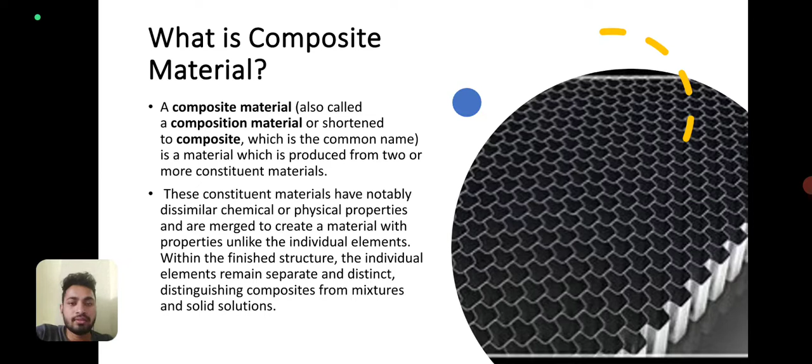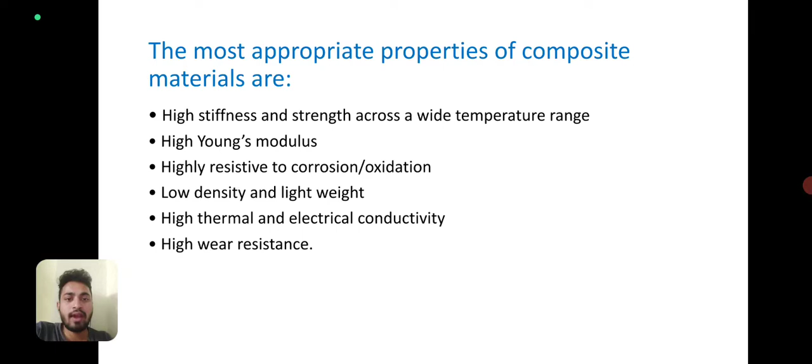The most appropriate properties of composite materials are high stiffness and strength across a wide temperature range, high Young's modulus, high resistance to corrosion and oxidation, low density and light weight, high thermal and electrical conductivity, and high wear resistance. Let us see the characteristics of composite materials. There are many types. In this video we will discuss some important characteristics.

The first one is mass. Carbon composites are generally considered 4 times lighter than most steels. Density of steel is 7.8 kg per meter cube. Density of graphite damping composite is between 1.4 and 1.8 depending on composition.

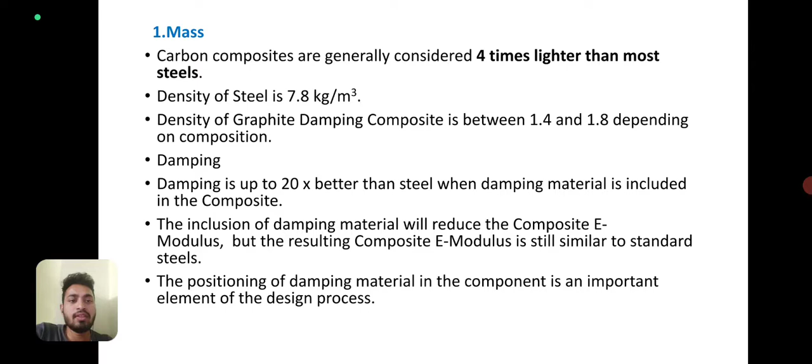It has good damping. Damping is up to 20x better than steel when damping material is included in the composite. The inclusion of damping material will reduce composite E modulus. The resulting composite E modulus is still similar to standard steels. The positioning of damping material in the component is an important element of the design process.

Second one is stiffness. E modulus of a graphite layer in the direction of a fiber can be over 400 gigapascal using 760 gigapascal fiber. A quasi-isotropic steel equivalent laminate will have an E modulus of 150 gigapascal in both x and y directions. Hence, the need to use 1.3 times the thickness to maintain the equivalency of 210 gigapascal steel.

Optimizing the stiffness in different directions or between bending and shear stiffness is a normal part of the design process, which is not possible with steel. And the third most important characteristic of composite materials is strength. The maximum strength of a steel equivalent composite is about the same as the yield point of standard steel, about 385 megapascal. Many machine components need stiffness or damping rather than strength, and the volumes of material necessary mean that the stress levels are consequently very low.

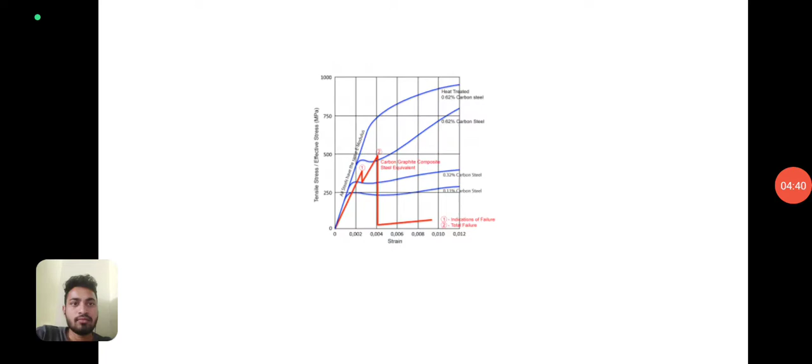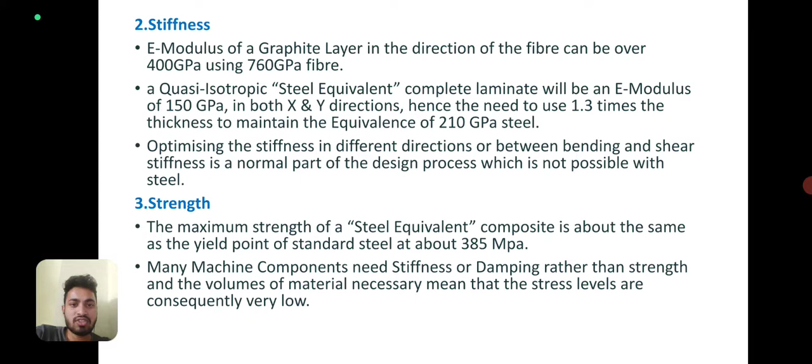The maximum strength of a steel equivalent composite is about the same as the yield point of standard steel at about 385 megapascal. Many machine components need stiffness or damping rather than strength, and the volume of material necessary means that the stress levels are consequently very low. Failure. Composites do not have a yield point. Composites could micro crack in the matrix at about 75% of ultimate load. This can be considered the composite equivalent of a yield point. However, unlike steel, the E modulus does not change and the stress strain curve is a straight line until failure. Composites fail in compression or the compression side of bending at about half the tension failure stress level.

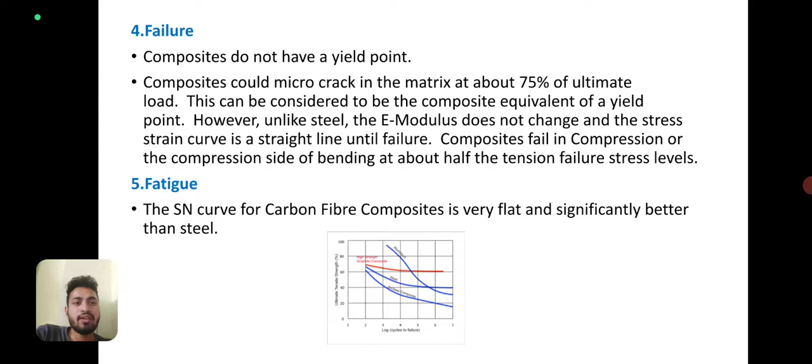Fatigue. The SN curve for carbon fiber composites is very flat and significantly better than steel. Expansion. PAN fiber has a positive coefficient of thermal expansion. Graphite fiber has a negative coefficient of thermal expansion. When made into a composite, it can be designed to have zero expansion in a specified direction, provided this does not conflict with other required properties.

Machining and precision. In composites, it is not good to cut the fibers that are responsible for stiffness or strength. It is usual to add an extra layer of some material in order to create a machined surface. Carbon composites machine well, but require special equipment for the safe disposal of dust or slurry. Accuracy of tooling dictates the accuracy of the part, and this is very useful in obtaining accurate inside dimensions without machining. This can be a significant saving.

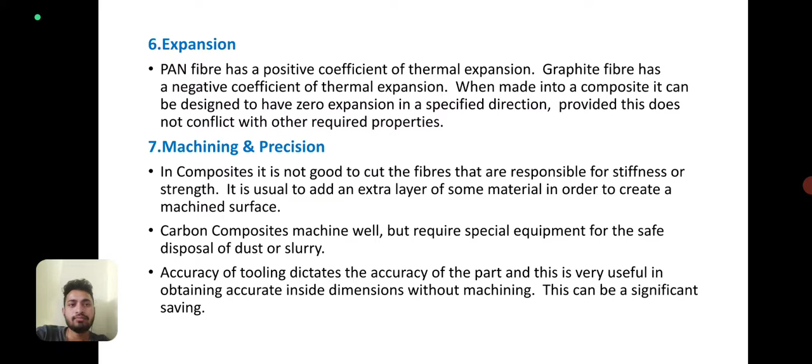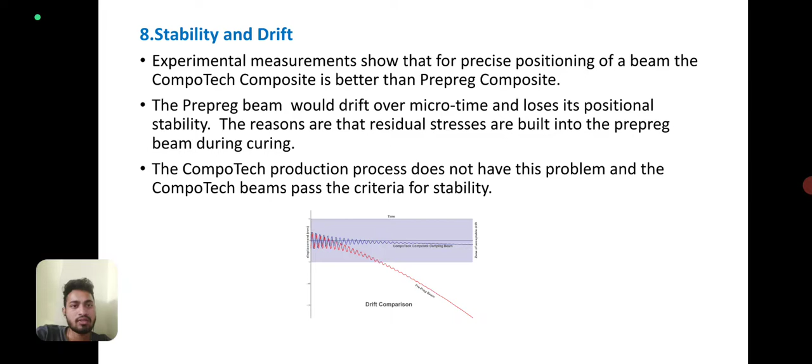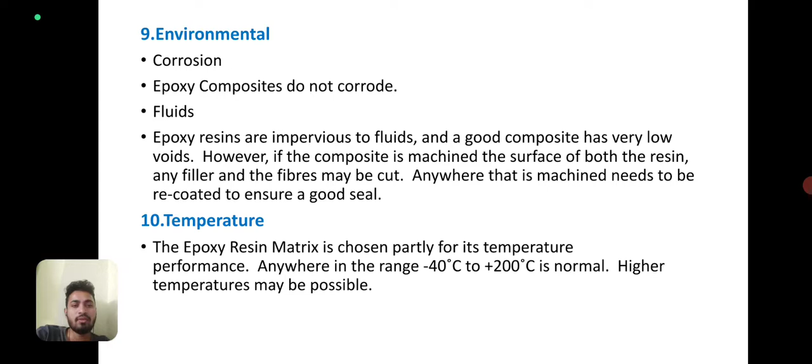Temperature. The epoxy resin matrix is chosen partly for its temperature performance. Anywhere in the range -40 degrees to +200 degrees is normal. Higher temperature may be possible. Ultraviolet light. UV is a problem for epoxy resins, and there are many additives to reduce this degradation. However, this is only a surface problem and can be overcome with the correct choice of coating should there be any danger of UV.

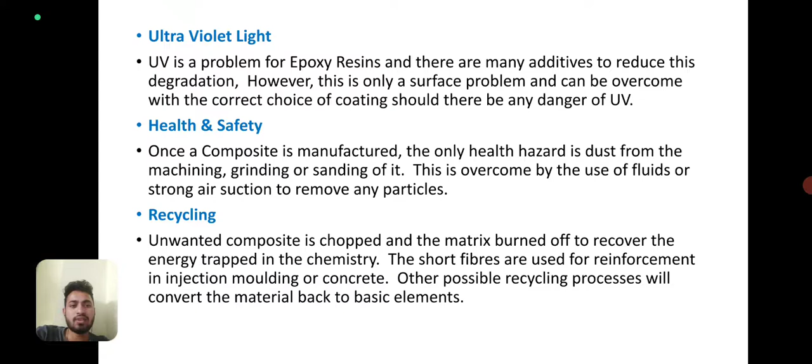Health and safety. Once a composite is manufactured, the only health hazard is dust from machining, grinding or sanding it. This is overcome by the use of fluids or strong air suction to remove any particles. Recycling. Unwanted composite is chopped and the matrix burned off to recover the energy trapped in the chemistry. The short fibers are used for reinforcement in injection molding or concrete. Other possible recycling processes will convert the material back to basic elements.